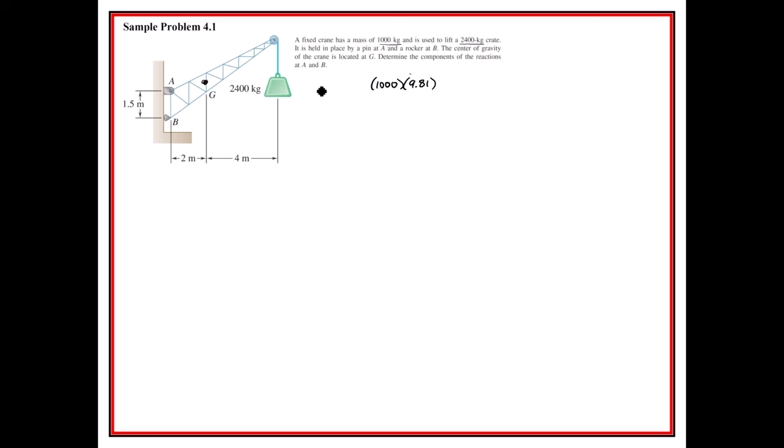So some preliminary things. They tell us that the crane right here is going to be 1,000 kilograms. And the crate is 2,400 kilograms. I want everything in newtons because we're going to deal in forces, so I'll get that out of the way here. And so times 9.81, the weight of the crane is 9,810 newtons. And actually the book does it with kilonewtons, which is going to be a little bit more convenient. So it's an obvious conversion there.

So I'll stick with that, 2,400 times 9.81, and I can just say it'll be 23,540 newtons, or obviously 23.54 kilonewtons. This just gets some preliminaries out of the way. We want to determine the components of the reactions at A and B.

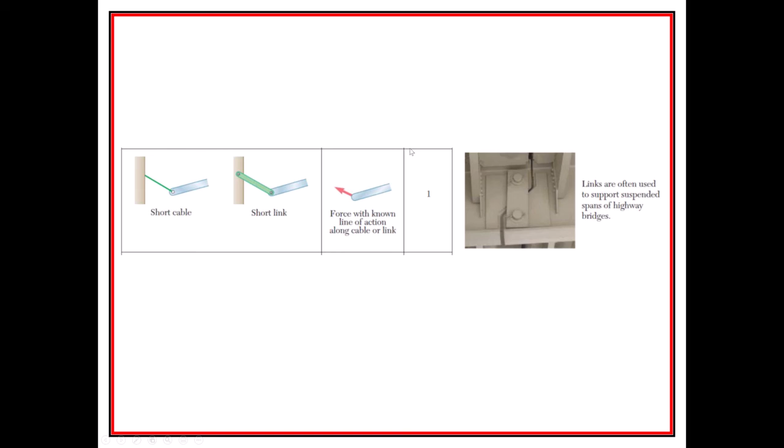And if we look closely, we can see that A is a pin joint, where B is like this little rocker joint. And that rocker joint, if we recall, oops, I'm going in the wrong direction here, using the wrong mouse. If we look back up here, we can see that this kind of joint, that rocker joint, only has a force in the perpendicular direction. So that's something to keep in mind.

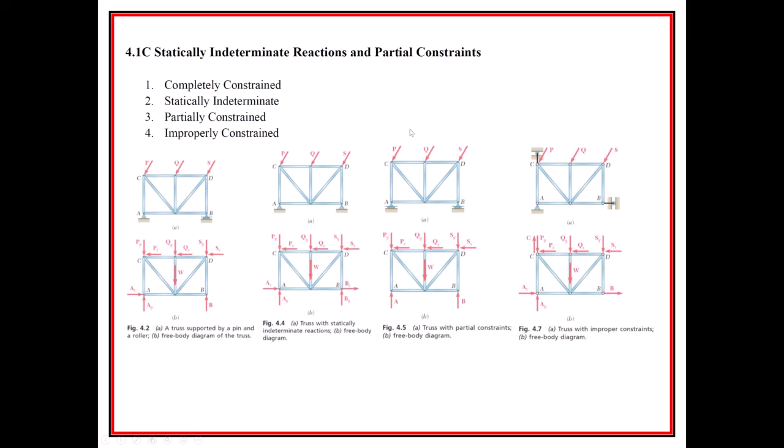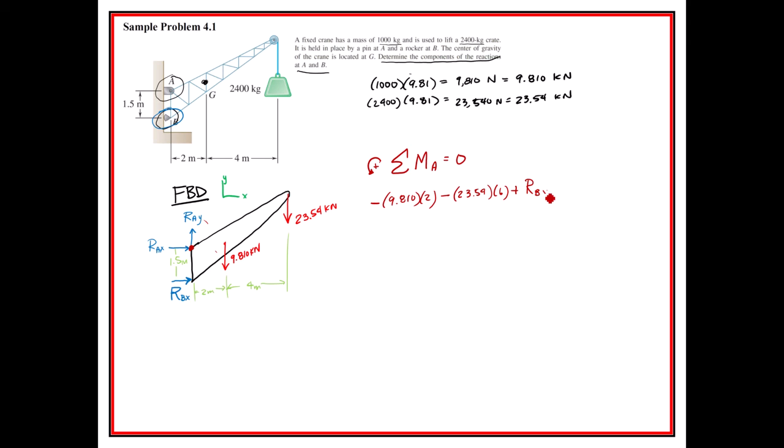And now we go to the reaction, and we can see that the reaction at B, as drawn, goes counterclockwise, right? It's going wee right around A. RBX, and that perpendicular distance to that reaction force is 1.5. So doing this math here, we end up with 107.2, and these are kilonewtons. Remember that all the forces were kilonewtons, all the distances were meters. Of course, all of those meters are just going to cancel out, so we have a kilonewton as our answer, and it was positive, so we could go ahead and box that guy out. That's a reaction force at B in the X direction.

Now, in the Y direction, we actually didn't need the moments for this. Just looking at this right here, we say the sum of the forces in the Y direction equals 0. Declare upwards as positive. We have RAY pointed upwards as drawn, and then the 9.810 is downwards, and then the 23.54 is also downwards. So we get RAY is going to be 33.35 kilonewtons, and that's upwards.

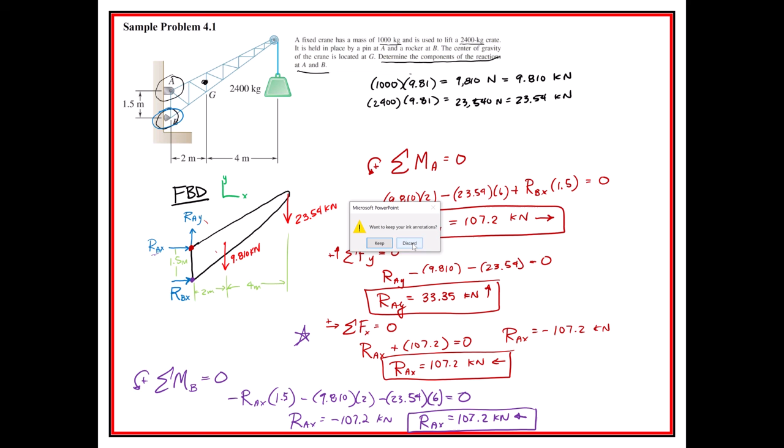So that was sample problem 4.1. Take a look at the book. Read their version, or their approach. I would rather you gravitate towards mine, but what they've done is fine. But you'll see that this is very much a standard approach, a problem that we will do many, many times in many different classes.